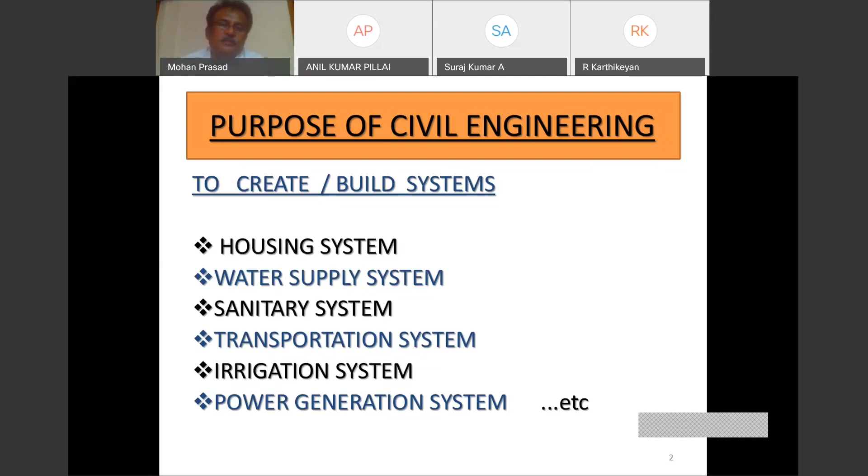Before we dive in, I want to put a few things in proper perspective. First, the foundation is the lowermost part of the structure which is in contact with the ground and which transfers the load of the structure to the subsoil without overstressing. So we want a safe and economical foundation, and for that, the load, the stress on the underlying soil, should not be overstressed.

So the obvious question is, what happens if the underlying soil is overstressed? Obviously, the soil can fail. The soil can fail in two ways. One is excessive settlement and another is shear failure. So let's look at the first type of failure, excessive settlement.

As we all know, however strong and good the ground may be, and however light the structure may be, there will always be some settlement. There is nothing one can do about it. But what really matters is that the magnitude of settlement should be within permissible limits. If the resulting settlement due to the applied load exceeds permissible limits, then there will be distress in the structural elements.

There can be cracks, and collapse of the structure is also possible. The second type of failure is shear failure, wherein when the soil is overstressed by the foundation, the underlying soil may divide or separate itself into zones and blocks, and these blocks may have a tendency to slide past one another.

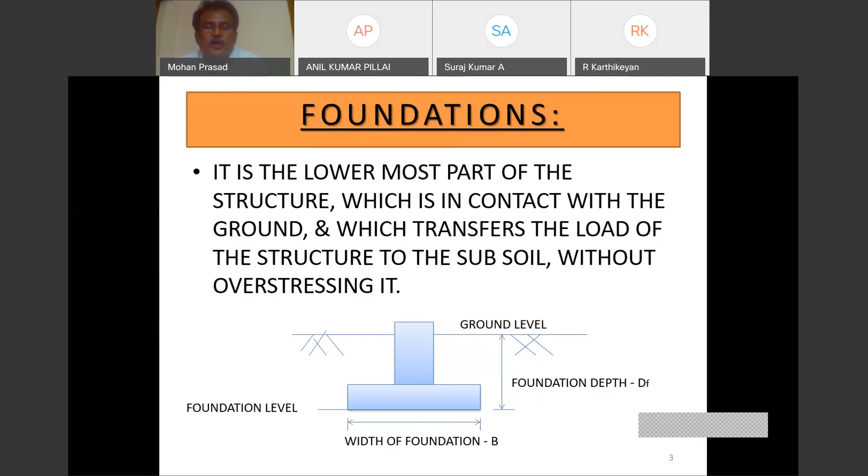So this is a typical mode of failure, mode of shear failure. You can see that at the moment of failure, there is a portion of wedge, a triangular wedge, immediately below the soil, which acts as if it is part of the foundation itself and tries to pierce into the ground like a spear. The tendency of that wedge to pierce into the ground makes the soil in zone 2 on either side rotate with the edge of the footing as hinge. That can make the soil in zone 3 on the outermost side move outwards and upwards, causing a mound.

So what we see at the time of failure is the foundation suddenly sinks down and the soil on either side heaves up. This type of failure is called shear failure, which is possible if the soil below the foundation is overstressed.

This volume of soil within which the shear failure takes place is called the shear zone. Normally the length of this shear zone will be 3 to 4.5 times the width of the footing, and the depth within which this shear failure takes place may not be more than 1.5 times the width of the footing.

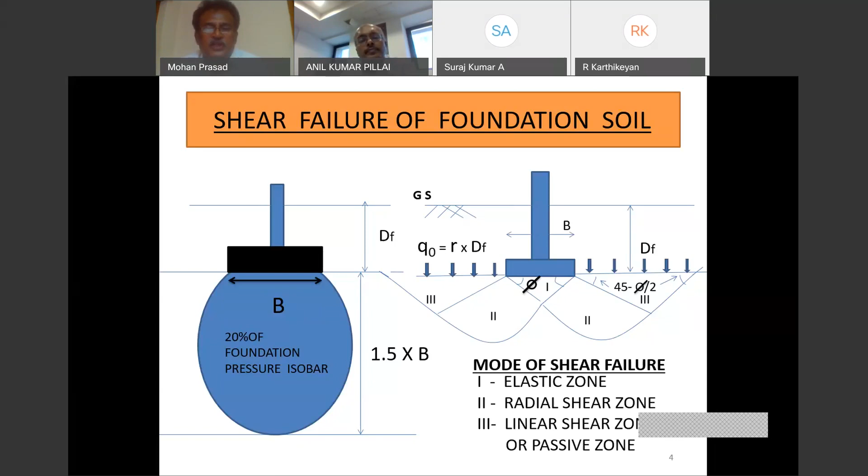To design a safe and economical foundation for a structure, we need a lot of information about subsoil, both by way of laboratory tests, field tests, and other site conditions. A study which provides all of this essential information constitutes soil investigation, which goes by other names also: soil exploration, geotechnical investigation, geotechnical exploration — all mean the same.

So we must be very sure about one thing: the main purpose of geotechnical investigation is to establish the stratigraphy of the site. That is the most important objective.

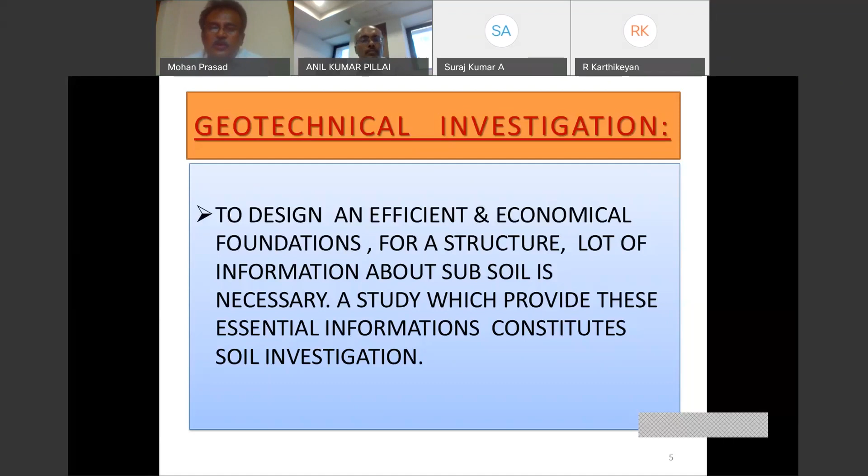So just let me present a typical stratigraphy. Here you see we have probed the soil from ground surface till the significant depth which I mentioned, which is 1.5 to 2 times the probable width of the footing. So we have here 1.4 meters thick fill, which is loose, heterogeneous, random dump.

As the N value suggests, this fill is in a very loose condition, and there is a groundwater table at a depth of 1.1 meters.

Beneath this fill, we have a very dense sandy gravel, which gets classified as GW-GM as per Indian Standard Classification System. The N value suggests that the stratum is very strong and very less compressible, and the shear parameters suggest the same thing.

Beneath that, we have 3.6 meters of medium stiff clay, whose water content is 28.7%, N value is just 7, and shear parameters are also in a very modest range, beneath which there is compact weathered rock, which records an N value greater than 50.

Beneath that, there is a degraded soft rock. All of that is very strong and less compressible.

So a picture which gives the various layers of soil from ground surface till significant depth, the sequence, the thickness of each layer, the soil identified in each layer, and the physical and engineering properties — this is what we call stratigraphy, which is the raw material for foundation analysis and foundation design. Perhaps the most important objective of geotechnical investigation is to establish a proper stratigraphy at the site.

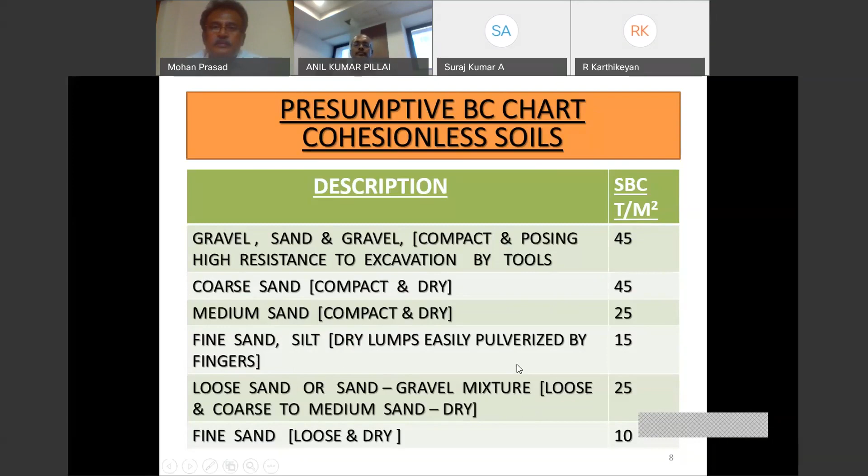Such an estimation is alright only in case it is a very light structure.

Geotechnical investigation is very important. At times we have advised our clients to demolish a structure - in one case, an 8-story building that went out of plumb by 8 inches. With a lot of difficulty, we had to advise the client to demolish the structure. Hardly, the cost of investigation may not exceed 0.5% of the total project cost, so it is a false economy to save on this.

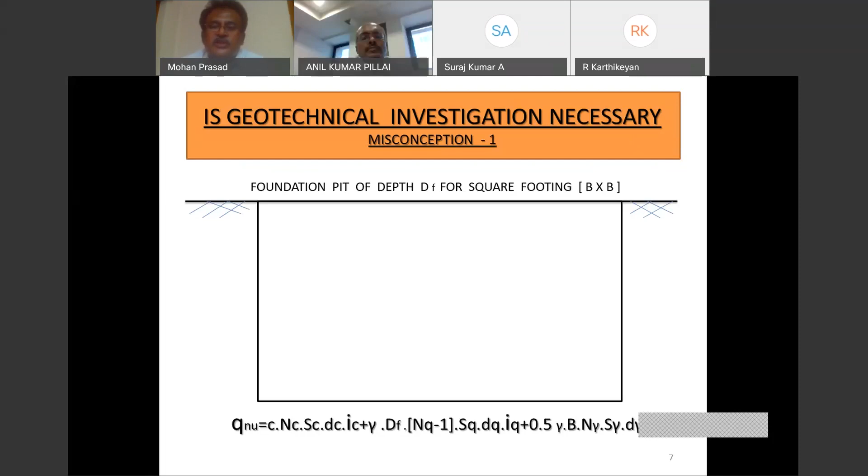So this is inevitable and very important. Now the second point is about the nature, extent, and depth of exploration. Let me briefly explain what is meant by that.

Nature of exploration - a lot of options, methods, and techniques are available for subsurface exploration and determination of allowable bearing pressure, settlement, and so on. It can be a simple test pit or trial pit, which may be justifiable only in the case of unimportant, temporary, lightweight structures.

Sometimes we prefer to make a borehole, take soil samples at different depths, and run laboratory tests on them to find the compressibility characteristics. These are fed into the bearing capacity analysis along with other relevant factors, and it is done.

We also have indirect methods like field tests - static cone penetration test, dynamic cone penetration test, standard penetration test, plate load test, pressure meter test - or even geophysical exploration like electrical resistivity method, seismic method, and so on. So we have a lot of options to accomplish subsurface exploration, and it is our discretion as geotechnical engineers to choose based on relevant aspects, for example, the extent of exploration.

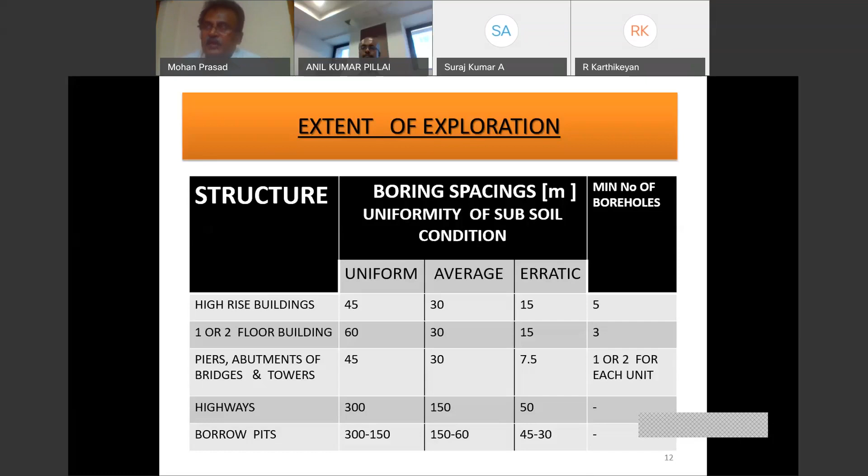Again, we have to make clear that this is just a guideline. For example, the Bureau of Indian Standards suggests that for an area as big as 0.4 hectares, that is 4,000 square meters, 5 boreholes should be all right, one at each corner and one in the center. But ultimately, the decision on the number of boreholes per site rests with the geotechnical engineer.

Reconnaissance is the first stage in any geotechnical investigation. Essentially, it is an information gathering process. It involves visual observations, and we consult maps and charts. For instance, we may take inputs from geologists to know the various formations, and we make observations. There may be rocky outcrops, open wells, cuts, ravines, slides, escarpments. All of this gives an idea of what the stratigraphy at the site may be like.

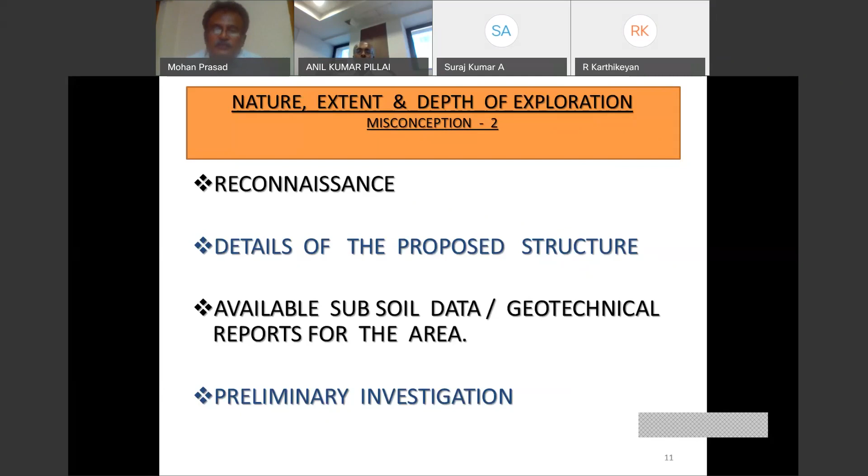So this is another guideline, depth of exploration. And I told you I have many options. One of the options is to go for the field test.

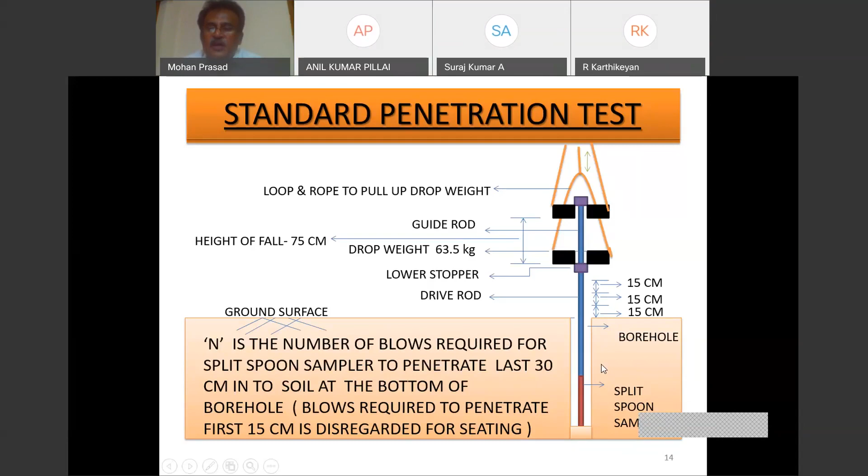This is a very popular, widely used field test, the standard penetration test, where a dropping weight of 63.5 kgs from a height of 75 centimeters makes the split spoon sampler at the bottom of the borehole penetrate into the soil. We count the number of blows required for 30 centimeters of penetration by this dropping weight falling freely from a height of 75 centimeters, and that is called the N value. Of course, this has to be taken with a pinch of salt, and we have to apply corrections to the raw N values we get from the field.

There are two types of corrections: correction for overburden and correction for dilatancy.

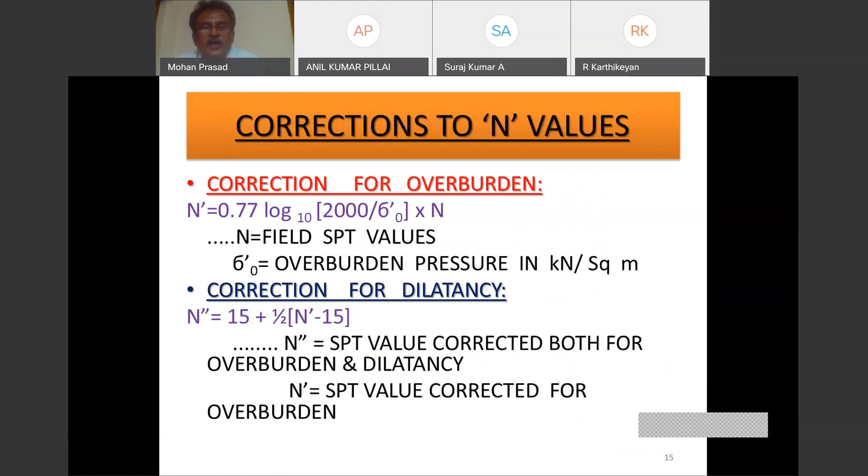And then we have another type of field test, which is very familiar, the plate load test. Here, a test plate is loaded and a relation is developed between the applied load and the corresponding settlement. This load-settlement curve can serve as the basis for obtaining the bearing capacity, settlement, and so on.

But this should be opted for where other options are not available. For instance, if it is not possible to extract undisturbed samples, or if the subsoil is highly heterogeneous, this test may be preferable. Again, we should be very careful, because what is true for a small size plate may not be true for a full size footing. This is called the scale effect, so the result should be interpreted with a lot of caution.

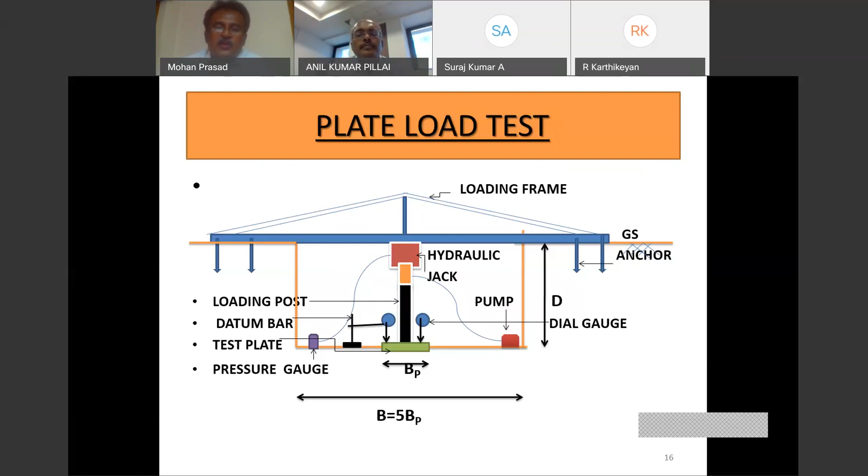In case of cohesive soils, the size of the loaded area doesn't matter much as far as bearing capacity is concerned. In case of cohesionless soils, there is an equation which has to be used.

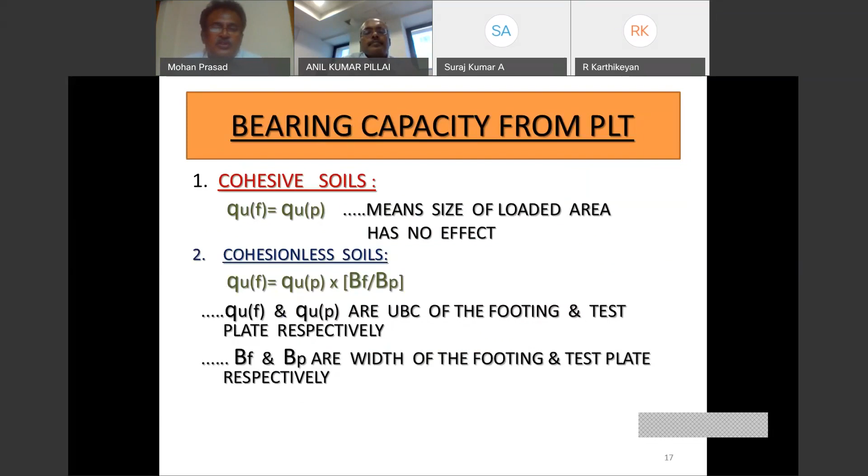And the third misconception is about the depth and type of foundation. To begin with, a structural engineer or architect is free to assume a certain type of foundation placed at a certain depth. It is a norm, there is no problem with that. But ultimately, in the end, it has to be vetted and validated by the geotechnical engineer, because there are a lot of factors which come into play while making this decision.

First, the depth of the foundation. There is what is called the minimum depth of foundation, and we must respect that minimum depth, and the foundation should be placed beyond the reach of burrowing animals. The foundation should also be placed such that there is no underscouring because of drainage, water, or a drain by the side of the foundation, which may result in loss of soil from below the foundation and loss of support.

If there is a fill, and it is not an engineered fill, meaning it is a random dump, then it is not reliable, because these fills cannot be characterized properly with any reasonable degree of accuracy. So it is better to bypass the fill and take the foundation well into the natural strata, at least by 0.5 meters. And again, the groundwater table is also a factor that comes into play while deciding the depth of the foundation.

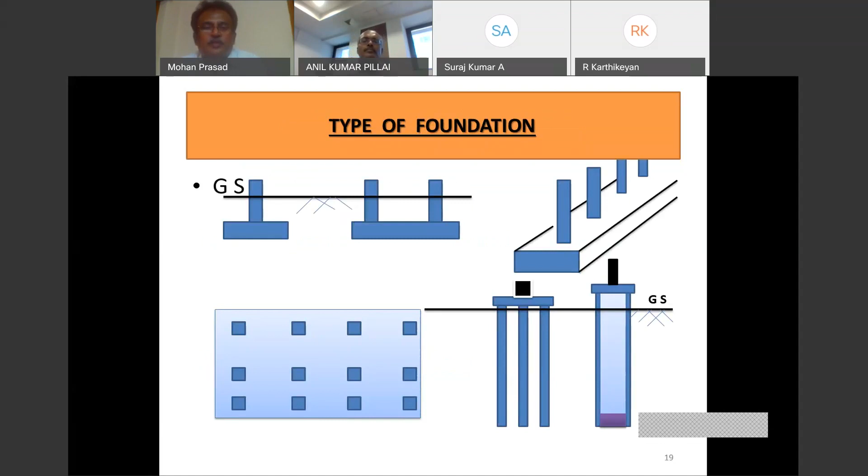Then the type of foundation, as you can see, we have different types of foundation, each with its own advantages, so we should be able to exploit the advantages offered by each. The type of foundation is decided on the basis of subsoil condition and stratigraphy, groundwater table position, type of structure and loadings, and the tolerance of the structure.

That is, what is the limit for angular distortion, what is the limit for differential settlement, what is the limit of total settlement specified in the codes. IS 1904 is the code which gives all these details. So depending upon this, we decide the depth and type of foundation.

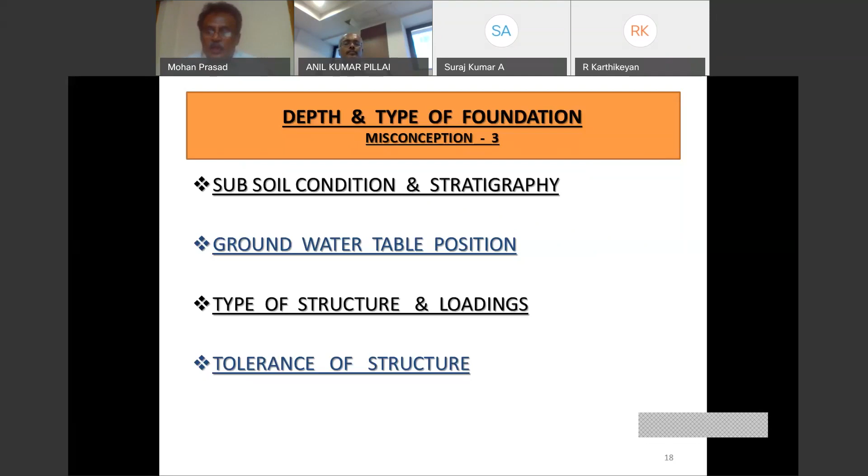So this hard stratum can act as a raft if there is sufficient thickness of it below the foundation level. And in case the load coming from the columns, structural loads, are very heavy, then we may opt for deep foundations like piles and all.

So here there is a very hard stratum by way of compact weathered rock whose N value is greater than 50. Below that, there is a degraded soft rock, though the RQD is 0%, which means it is highly fractured, highly degraded. The N value is greater than 100. So these two layers may prove to be very good bearing stratum where the piles may be rested.

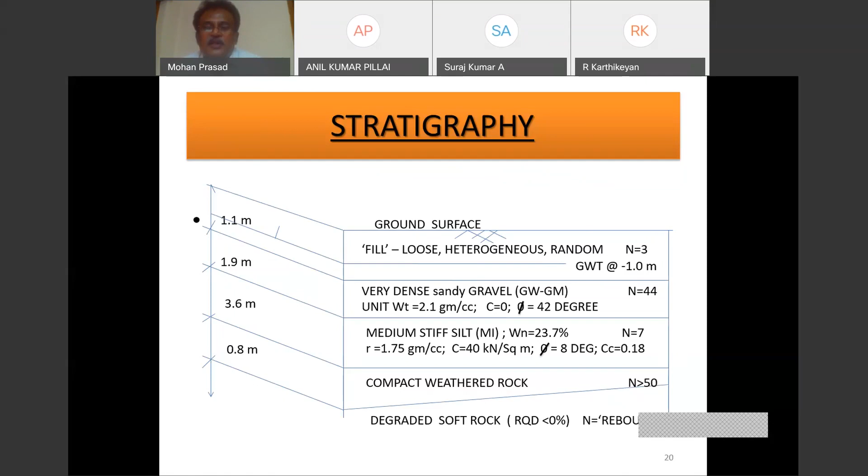So the type and depth of foundation is based on certain relevant aspects. So it is better left to the discretion of geotechnical engineers. To begin with, the structural engineer or architect can assume something, but ultimately it has to be decided by geotechnical engineers. That's what I mean.

Now, this geotechnical investigation does not happen in isolation. There are inputs necessary from structural engineers and architects. It so happens sometimes we get inquiries where the structural engineer may ask, why do you need all this information? All we want is the bearing capacity. The implied meaning of that is the bearing capacity is a unique value and it has got nothing to do with the structure, but that is not the reality.

We need to know all the pertinent and relevant details about the proposed structure in order to make a judicious decision regarding the foundations. First, the layout plan of the site. We would like to know where exactly the proposed structure is going to be seated within the site, because we don't want to end up doing our geotechnical investigation in a portion where the structure is not coming up. We have done the investigation in one place, but the structure is sitting elsewhere.

This is one experience I normally come across in case of KPTCL receiving stations, substations. They acquire large tracts of area, 2 to 3 acres, 4 acres for substations, and they won't tell us where exactly the control rooms, transformers, transmission towers, and staff quarters will come. So many times it has happened, we have done this soil investigation in one place, and when we visit that site sometime later, we see that all these structures are elsewhere. So it defeats the very purpose of soil investigation.

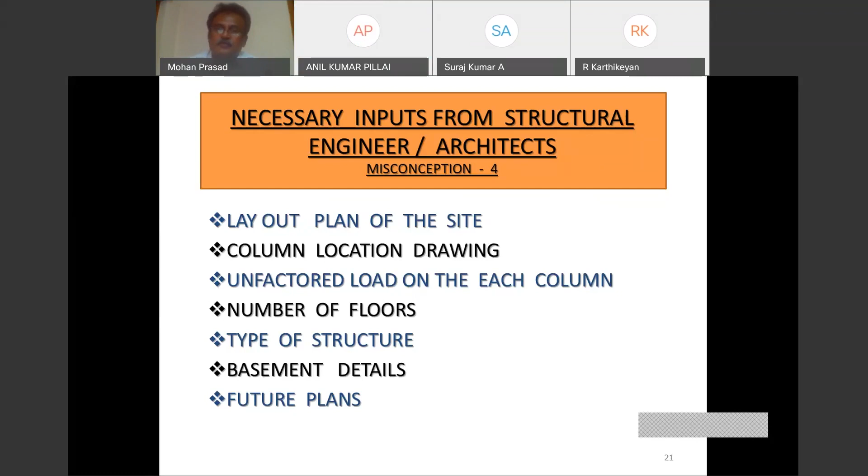There's a slight problem with the audio, sir. It's not... Yeah, now it's okay. In between there is a problem. I'll cut the volume.

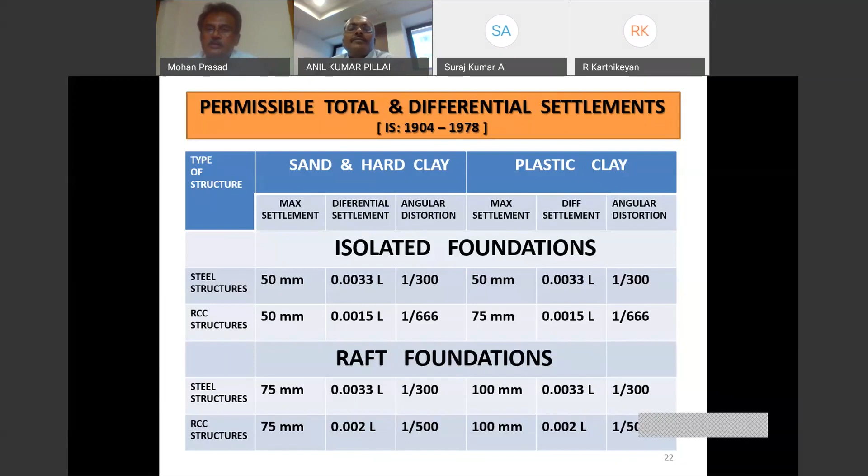Now the next misconception, so to say. The main objective of any geotechnical investigation is to design the foundation, to find the allowable bearing pressure, the foundation pressure at which the possibility of failure is not there.

If the foundation depths are great and if there is going to be a basement, an additional problem comes into the picture: stabilizing or supporting the sides of the excavation. If overlooked, there is a grave possibility of the sides caving in and endangering the lives of people working within the excavation. It can also destabilize the adjoining structures, which is a problem.

And if there is already a building by the side of the site, the loads coming on the footings of the neighboring building may disperse into the site, so the loads can get transferred. That must also be looked into. And if the adjacent ground is at a lower level, there can be flowing and loss of embedment. So you may have to provide a retaining wall to retain the earth so that the embedment and support are ensured and not compromised.

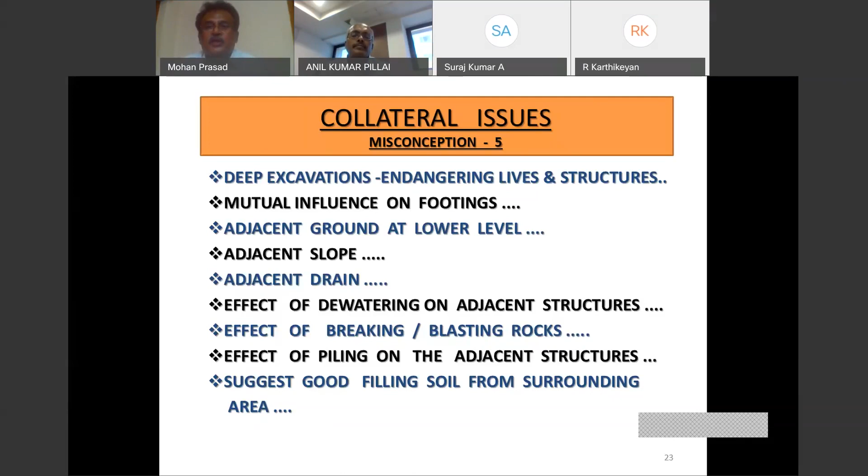Well, the next misconception is regarding bearing capacity when the site is rocky. Normally the tendency is, if the site is rocky, what is the necessity of geotechnical investigation? We can assume a bearing capacity of 50 tons per square meter or 60 tons per square meter and go ahead with our structural design.

But the bearing capacity of a rocky foundation material can be as much as 600 tons per square meter or 800 tons per square meter. We should be able to leverage the goodness of this rocky formation so that much can be saved on foundation expenditure. So a rocky foundation material also can fail like any other foundation material.

It can fail by excessive settlement. In fact, the guiding code IS 12070, which deals with the bearing capacity of rocks, stipulates that the permissible settlement for rocky foundation material is 12 mm, which is much more stringent than what it is for soil. So the logic is...

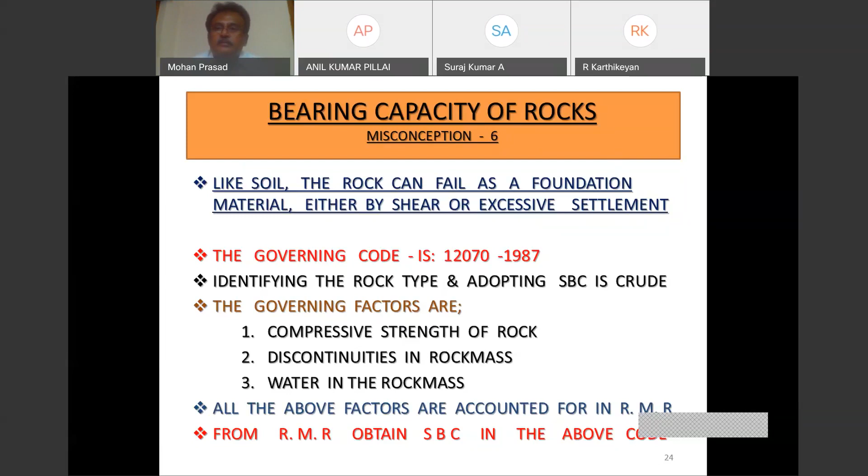And if the rocky formation is highly weathered, it is hardly rock. So if it's a transitional material between soil and rock, then one can think of DCPT, that is dynamic cone penetration test, or pressure meter test, or plate load test, and one can get the bearing capacity based on that also.

Another thing one should be careful about: while placing footings on the rock mass, all the loose material should be removed and it should be leveled. If necessary, the footing should be bolted to the rock mass, because the size of the footing should normally be less than what it will be for other foundation materials. And if the moment is large, then some kind of fixity becomes necessary, so benching and bolting becomes necessary.

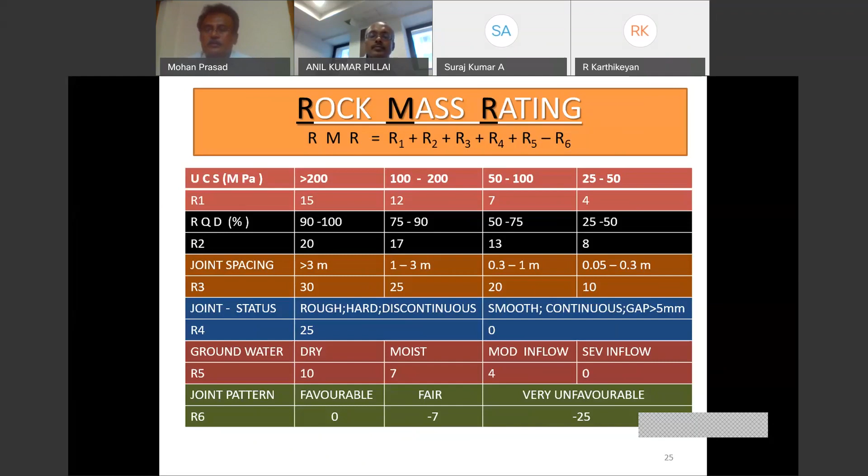Now the next misconception. Sometimes the subsoil conditions at a site will be very difficult, problematic, troublesome, and challenging. Normally people will have a binary thinking: if it is not open foundation, if it is not isolated footing, let it be pile foundation or raft foundation. But there is a whole range of options available between these two extremes.

For instance, if there is a very thick deposit of weak, compressible soil, there are many things one can do. One can bypass this weak soil completely and take the foundation all the way down to where the firm stratum is available with adequate bearing capacity.

So that's where pile foundations and piers come into picture. The second option available is to modify the weak soil by way of ground improvement techniques and bring it up to our level of requirement, our level of expectation.

There are a lot of ground improvement techniques. I've indicated just one of them: insertions or inclusions called granular piles. It can be a sand pile or stone column. It can go up to the firm stratum, or it can be a floating column. After installing this, we can go for normal foundations because the bearing capacity would have greatly improved because of these ground improvement techniques.

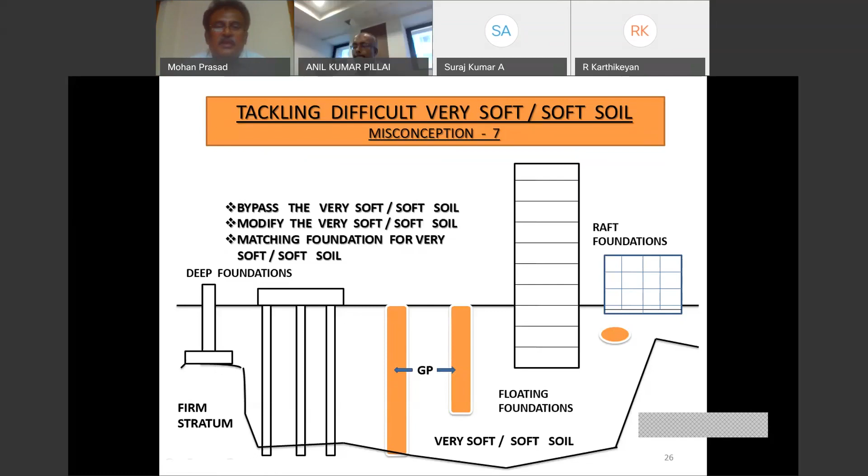The next misconception applies to both the geotechnical engineer and the structural engineer. The structural engineer should insist that the geotechnical engineer visits the site during the geotechnical investigation, and also when the ground is opened up, to see whether the prevailing soil conditions at the foundation level match what has been reported in the geotechnical report.

It's quite possible sometimes there will be local infirmities like a filled up open well or a wall or something like that. There can be soft pockets which go undetected during the geotechnical investigation. So it's better if the geotechnical engineer visits the site after the ground is opened up for the foundation, so that uniform conditions prevail, matching whatever he has assumed in his foundation analysis and design.

Also, when the geotechnical engineer is at the site during the investigation, we can visually inspect the area and make inquiries in the neighborhood, observe the cuts, fills, topography, drainage conditions, and so on. You can also observe the drilling effort and stratigraphy as the drilling process goes on, and have a rough conception about the subsoil conditions even during the field work itself.

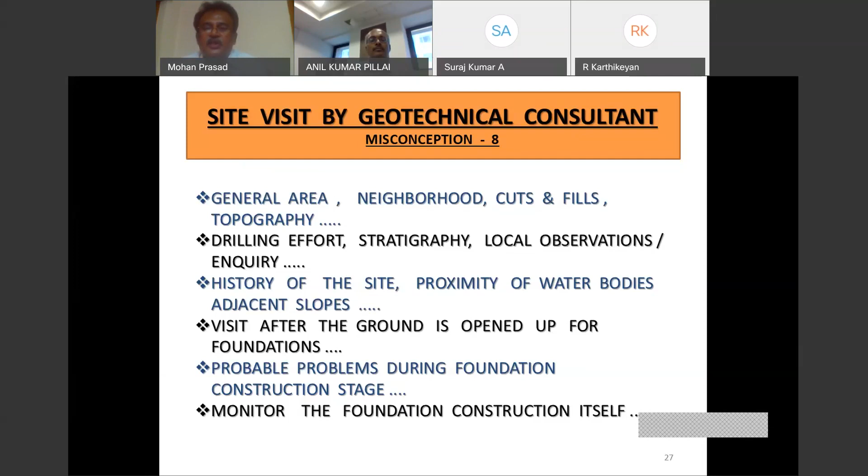Because many times our plans, our designs, our recommendations are not fulfilled during the foundation construction stage. For example, in case of pile foundations, we insist on tremie concreting. Sometimes the piling contractor will make a hole, put the reinforcement, and simply pour the concrete instead of tremie concreting. If the soil is chemically aggressive, proper cover should be maintained for the pile. All these things can be monitored and instructed to the piling contractor to ensure all recommendations are executed properly.

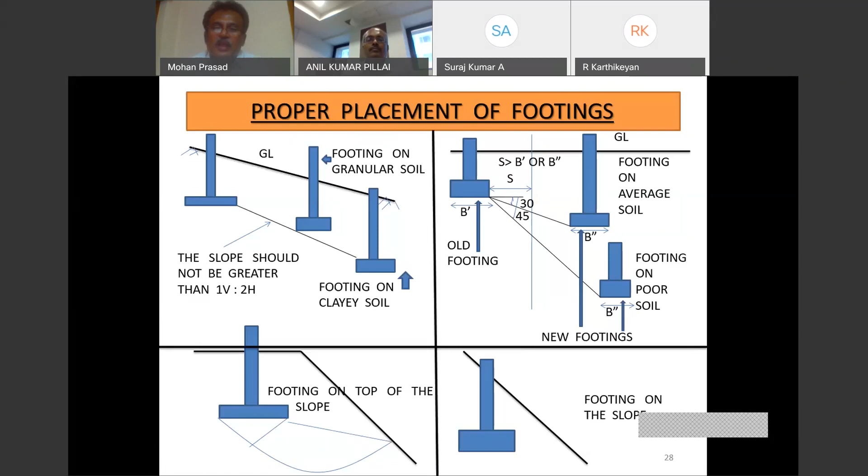Now, most of the times, the foundation material can be clay or sand. Rather let us put it this way, it will be a fine grained soil like clay and silt, or it can be granular deposits like sand and gravel or whatever.

So people are normally scared about clay. Everybody has got their own favorite phobia. Of course, if the soil is black cotton soil, one should be concerned because it is a well settled fact that black cotton soil is a problematic soil if not dealt with. So it's an expansive soil because of the mineral of which it is made.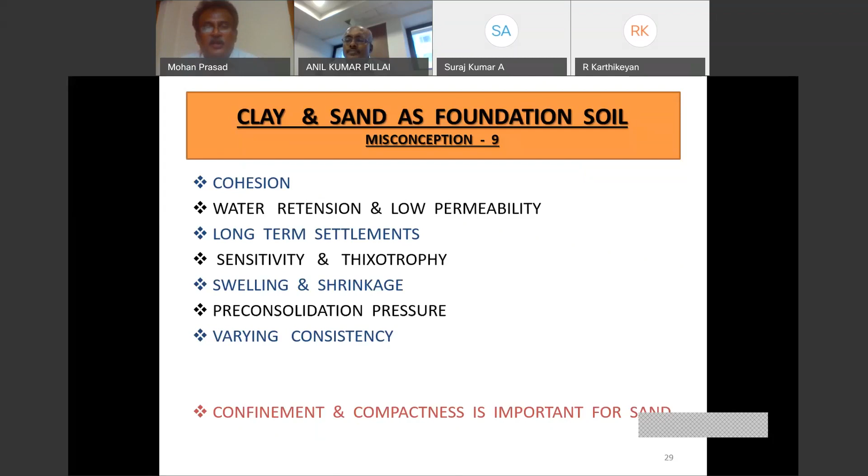So I can say anything can be built anywhere, provided the structural engineers, the contractors, or the clients allow the freedom, flexibility, and latitude for our discretion and judgment to tackle the situation. So it may be expensive or elaborate, but it may not be impossible. It may not be impossible.

Now, coming to the last misconception. So many times people don't take these geotechnical reports very seriously. All they do is see the last page where the recommendations are made - the type of foundation recommended, the depth of the foundation, the bearing capacity - and it looks like that's all they want. And afterwards, it is thrown away somewhere.

Also, in case of geotechnical reports, the correct and complete address of the site should be mentioned. And also the client should be identified by name and full address - if it is a company, the name of the company. And also it should be indicated in the geotechnical report, the date of investigation, the date of report submission, and so on. Also the details of the proposed structure as given by the clients, the authorities for the project, geotechnical investigation project.

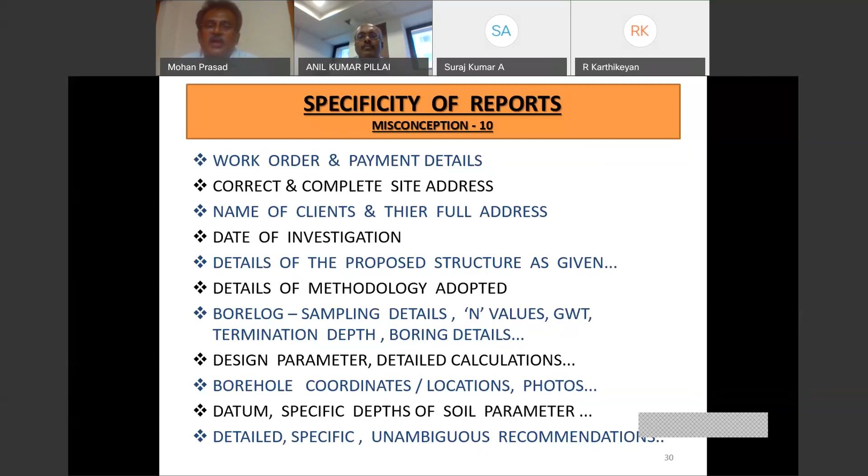I'm not being generic. These misconceptions could be there in some quarters. So it has to be dealt with.

Lastly, I'm coming to the end of my talk. We, as geotechnical engineers, have been at the receiving end for our investigation works being somewhat patchy, vague, nebulous, arbitrary, and so on. But we must also understand and appreciate the conditions and circumstances in which we work.

Unlike structural engineers who work with materials that are artificially composed in controlled conditions, like concrete and steel, we have to deal with the natural material soil, whose character is highly variable. It varies with respect to location, it varies with respect to depth, it varies with respect to seasons, and it can vary with respect to stress levels also.

And secondly, the domain is not fixed. For instance, if you take the settlement problem or the bearing capacity problem, the volume of soil involved, the extent of soil involved - the domain is not properly fixed. So we demarcate arbitrarily that some portion of the soil participates and has significant influence on the overall behavior.

And the material we deal with, that is soil, is hidden below the surface. Even if we carry out an exhaustive investigation, we would have tested, sampled and tested only one-millionth of the total volume, which is going to be affected by this construction project.

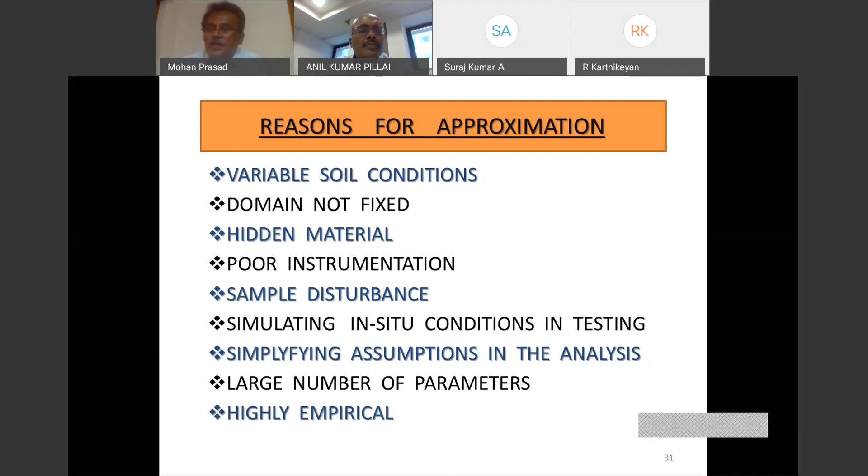It's all right, I can take questions. It was a very good presentation wherein you have outlined very clearly the misconceptions in the area of investigation and the coordination problems between the engineers as well as geotechnical experts.

That is excellent. One of the questions that has come is how to account for a soft pocket in rock foundation in deep excavation. That is a big problem. The rocky formation may not be there on the entire site. There can be some soil patch, called talus. So one should be careful to keep the permissible settlement that applies for the rock, for the soil also, which is 12 mm. And when it comes to rock, the better option would be to excavate the soft material, the soil or whatever talus, and rest all the footings on the rock. So the footing depths may vary for different footings. That's it.

How close can two isolated footings be placed? In order to avoid complexities in the structural design, one may keep them so close that the footings are nearly touching each other. So one can as well go for a combined footing instead of isolated footings which are very close. And again, one convention, one norm, is if the total area of the footing is more than 50% of the footprint area of the proposed structure, one can put a raft itself. So there will always be some mutual influence which will have to be taken into consideration during the foundation analysis.